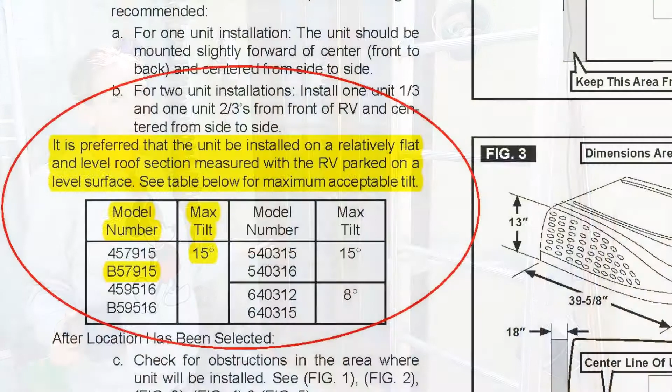The manual for the Dometic Brisk II tells us that we have a maximum tilt angle of 15 degrees. We're measuring the slope of the roof with a little angle meter, showing it to be less than 10 degrees. So it's essentially a flat roof, and we'll treat it like that.

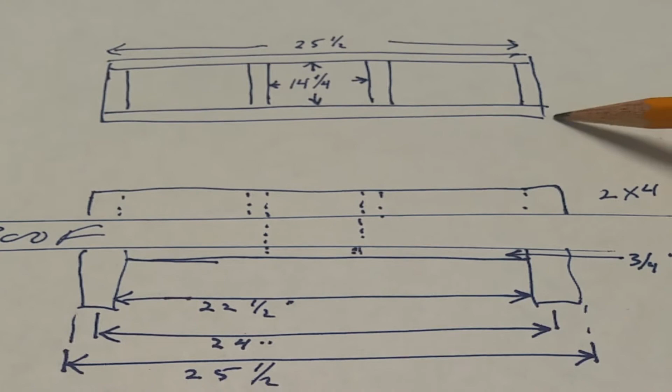To support the air conditioner, we're going to build a curb on the roof. The curb will extend to span the support beams for the roof. And then we'll have interior pieces to create the 14¼ inch opening that's required for the air conditioner.

Our roof is less than 15 degrees. Therefore, our curb will be constructed of a single layer of 2x4s on edge. If your roof is greater than 15 degrees, you'll have to construct a curb so that it creates a level surface on which to mount the air conditioner.

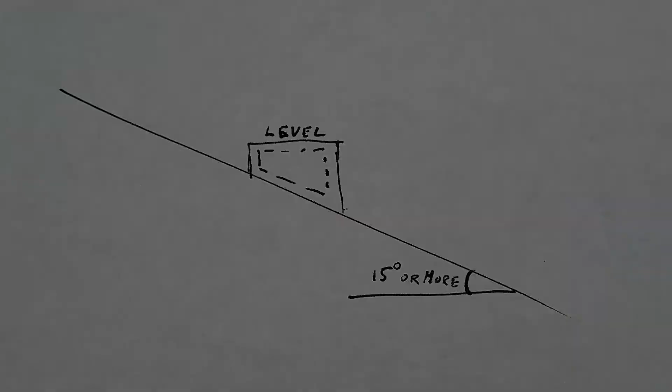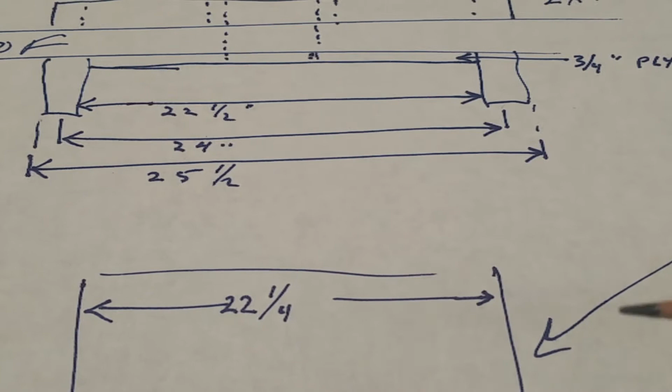Underneath, we'll have a piece of plywood, and that plywood will have the 14¼ inch hole centered so that we can tack it up to the ceiling and use it as a template as to where to locate the opening for the curb and then the air conditioner.

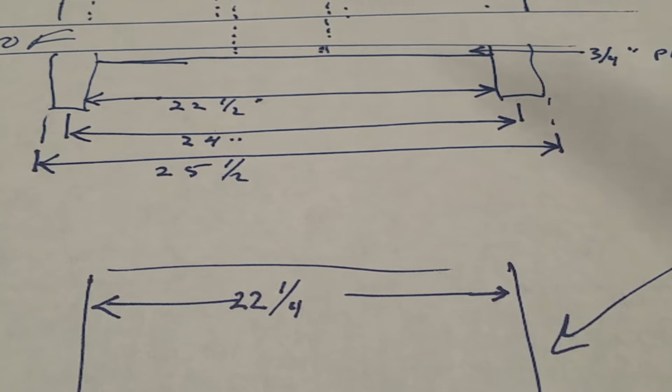The support beams for the roof are 24 inches on center, which means it's 22½ between the beams and 25½ to span the beams. So our support curb will be 25½ inches wide, and our plywood template will be 22¼ inches wide so that it can comfortably slip between the beams.

The 3/4 inch plywood, which goes on the bottom of the ceiling, not only acts as a template for where to cut the hole in the roof, but also provides a spacer that we can use to run the power into the control box on the air conditioner. Here you can see it laid out, and I used a router to cut a little channel where the cable goes.

Here you can see we've constructed the curb. You can imagine the roof support beams on either side. The curb will span the support beams, and then this 3/4 inch ply, which will fit underneath the roof, will slip between the support beams and also provide a template from where we can determine where to cut the hole in the roof.

Okay, so we've located the 3/4 inch plywood on the ceiling where we want the air box to be mounted. We've also drilled 4 holes, one in each corner, so we can find the markings on the roof when we go to install the curb later. So now we've used those 4 holes we drilled to locate the prefabricated curb and mark where we want to remove the roofing.

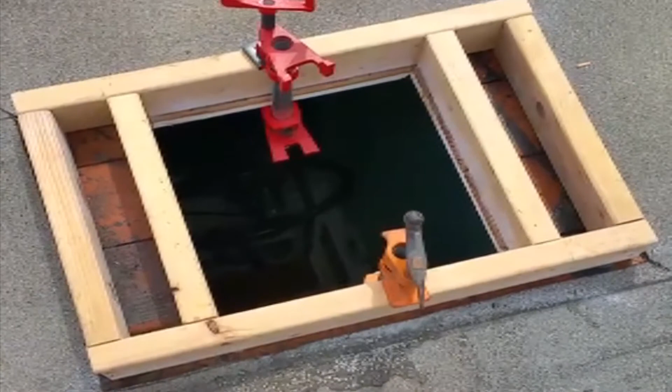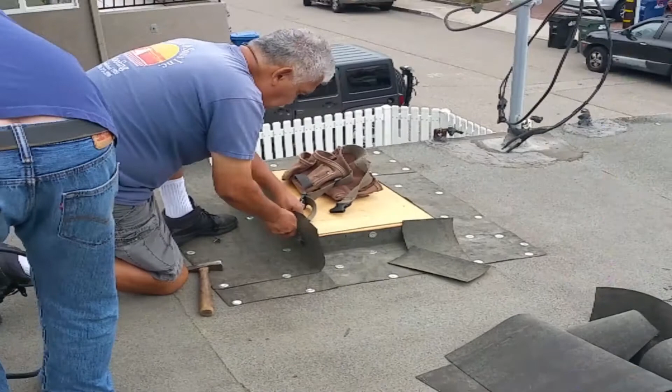Okay, so we got the hole cut, and I clamped it in position so it doesn't drift when we toenail the curb into those support beams running along the side on the bottom. Not too confident about my roofing ability, so I had a professional here seal up the curb.

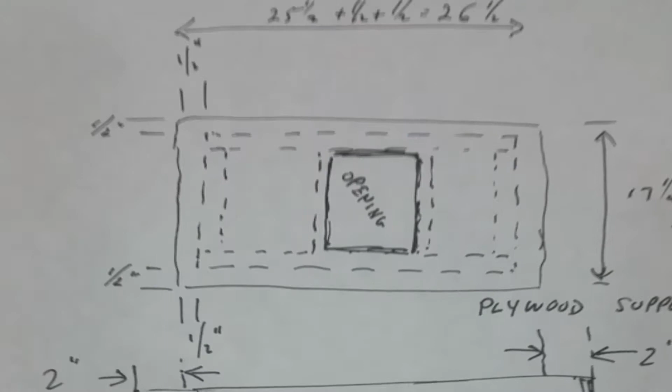We're going to want to add counter flashing to the top of the curb to make sure everything stays waterproof, and the water, when it rains or condensation from the air conditioner, can flow down onto the roof. First thing we'll do is cut a piece of plywood that's a 1/2 inch longer than the curb in each dimension. That way the counter flashing will fit over the roofing coming up the curb.

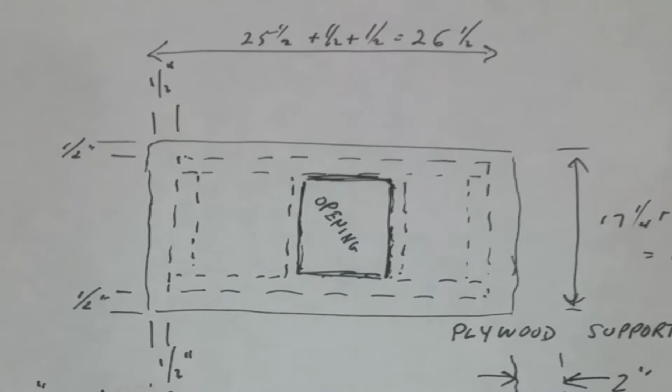So for example, the curb is 25.5 inches wide. We'll make the plywood 26.5 inches wide with the same 14.25 inch opening in the middle.

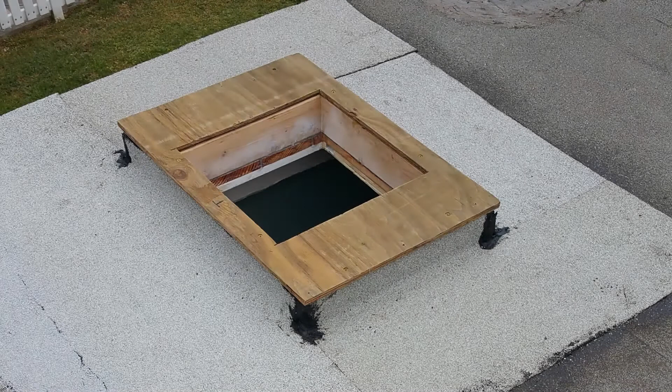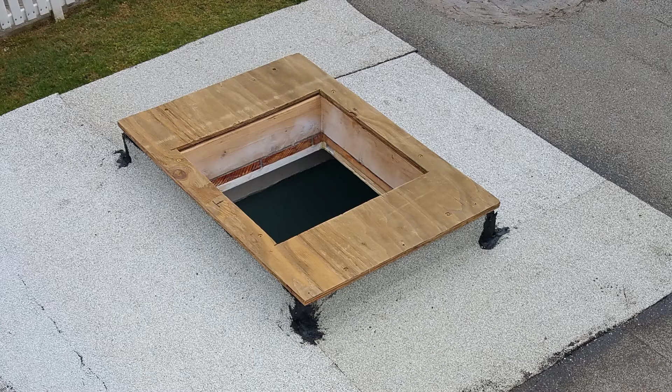So now you can see the roofing job is complete, and we've installed the 1/4 inch plywood that will support the counter flashing. If you look carefully, you can see that the plywood does extend beyond the roofing on all 4 sides, and it's been fastened to the curb with screws, and it's ready to go.

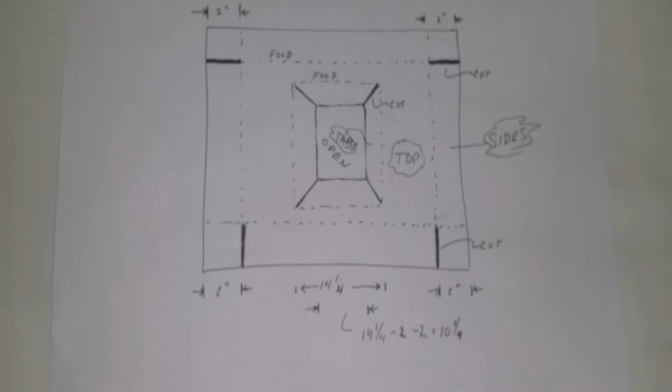Okay, so now that we got the plywood support in place, we'll make the counter flashing itself. We'll start with a sheet of galvanized sheet metal, and we'll cut it so that it is 2 inches larger than the plywood in every dimension. That's so that we can fold that down later to make the sides of the counter flashing.

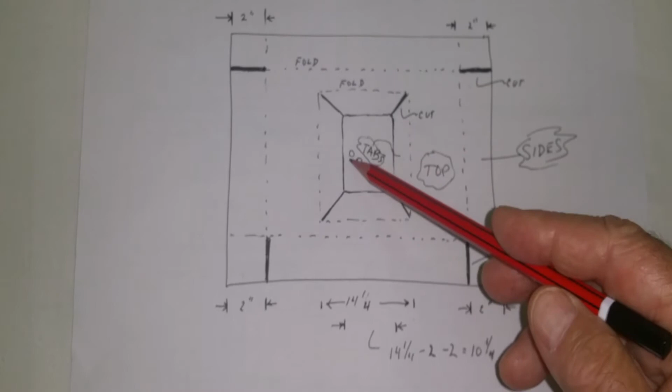In the center, we'll cut a hole that's the size of the opening, 14.25 inch, less 2 inches on each side. So 14.25 less 2 is 10.25. And we'll have a 10.25 inch square opening, and then we'll cut these slits indicated by the solid lines, and then we'll just fold it in place and have our counter flashing.

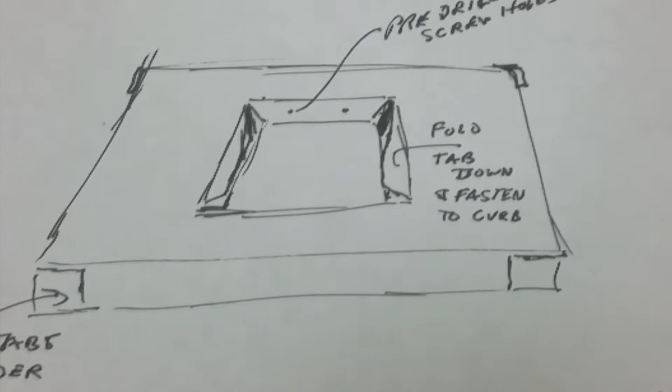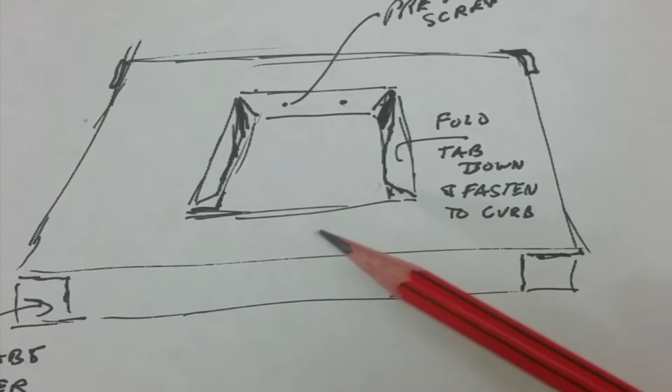Okay, so this is my little sketch of what we'll wind up with. So those cuts that we made, when we fold that down onto the 14.25 inch hole in the curb, we'll have these nice little tabs that we can secure the counter flashing to the curb. Then this will be a nice flat surface for the air conditioner to seal against, so we won't get any rain leaking in past that gasket that's on the bottom of the air conditioner.

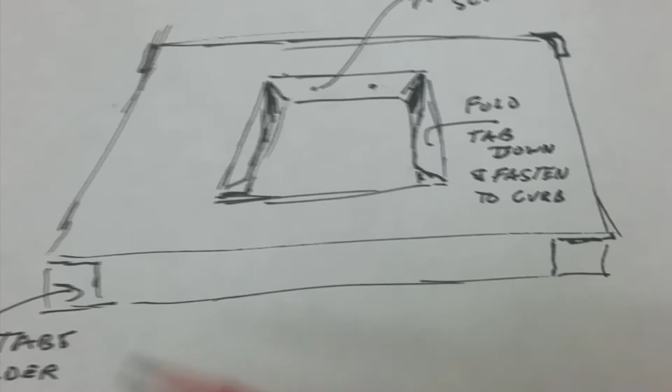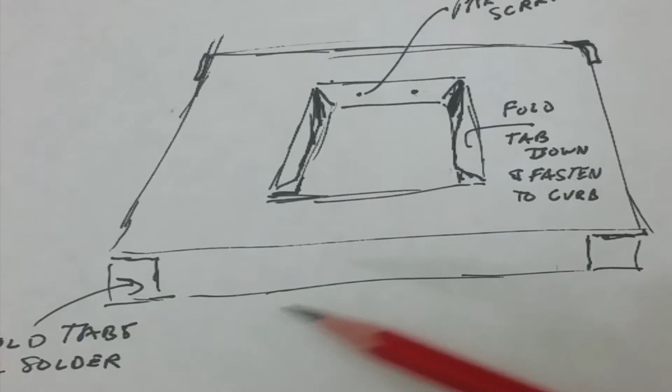After we fold down these ends, these tabs will fold over, and we're going to actually solder these tabs to the down piece, and so that'll make a nice watertight seal, so any water that gathers up here will flow right down past the top of the roofing and onto the roofing itself.

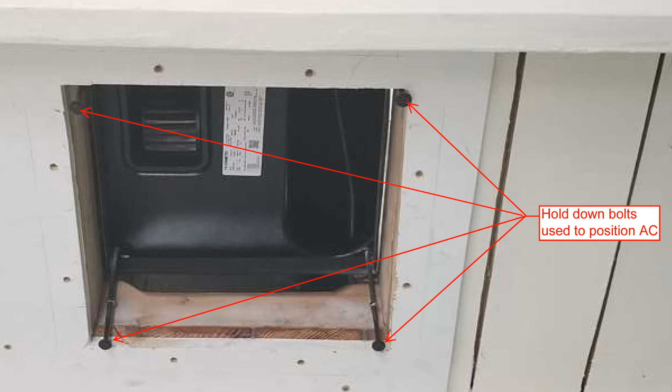Right here you can see the air conditioner is sitting on top of the counter flashing, and the roofing has been completed, and we're ready to go down underneath to finish. Here we see the air conditioner from the bottom looking up. It is sitting on top of the counter flashing and on top of the curb, and we have screwed in the hold down bolts a few turns so that we can use them to properly center the air conditioner in the opening.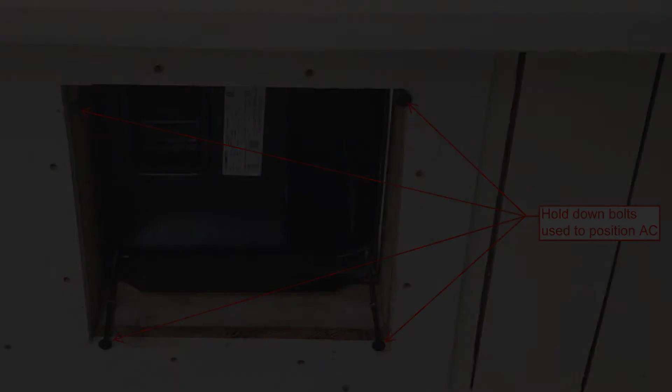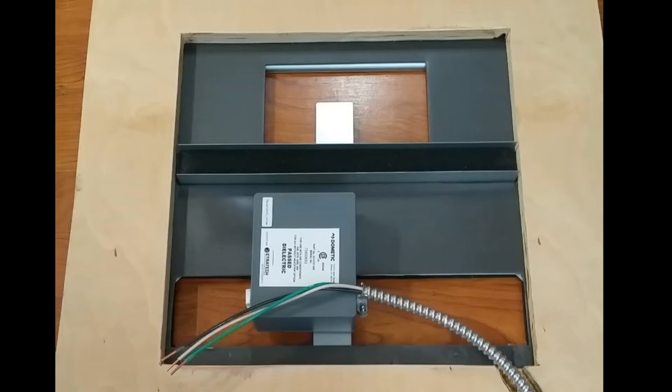Again, looking up at the bottom of the air conditioner through the opening, you can see the counter flashing tabs flush with the curb. We'll screw these tabs down to the curb and secure them that way. The control box is mounted on the air conditioner bottom support bracket inside the air distribution box and in the return air passage.

Now we have the bottom bracket for the air conditioner in place, and you can see the hold down bolts are now going through this piece and through some structural channel iron that's included with the piece. We torque the bolts to the specification, which compresses the air conditioner gasket, and everything is now nice and secure. Here we have the air distribution box fully installed with the power cable going to a junction box ready to complete wiring.

Just a quick word on thermostats. The air conditioner control box comes with the thermostat kit. One issue is that the thermostat and the air conditioner control box require 12 volts DC. Thermostats designed for the home normally operate on 24 volts AC. Therefore, to complete the RV air conditioner installation, we need to provide a 110 volt AC to 12 volt DC converter. Fortunately, these are readily available through Amazon, eBay, and so on.

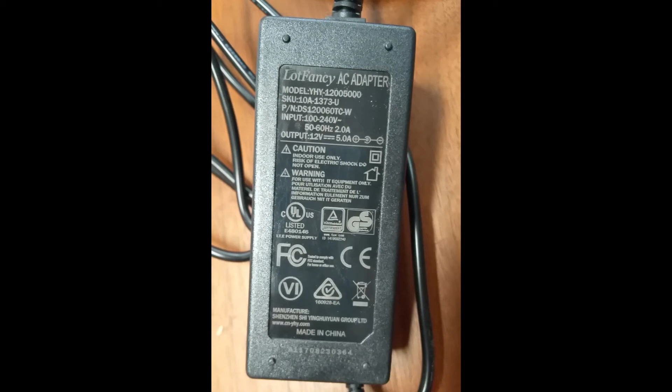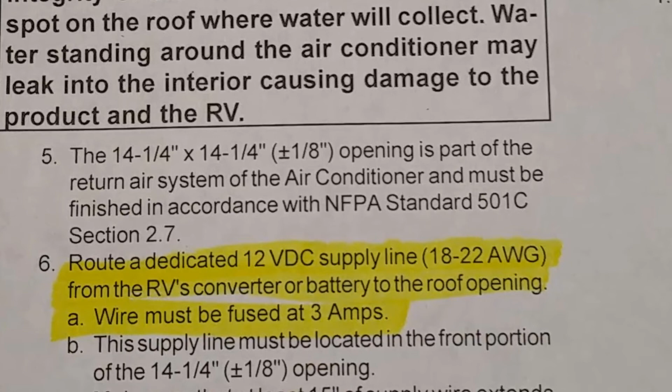The installation manual also requires a 3 amp fuse on the 12 volt DC wire. Here you can see the 110 volt AC to 12 volt DC converter plugged into an outlet and wired to a fuse block with the required 3 amp fuse. Wires from the control box and the thermostat are also connected in this low voltage junction box.

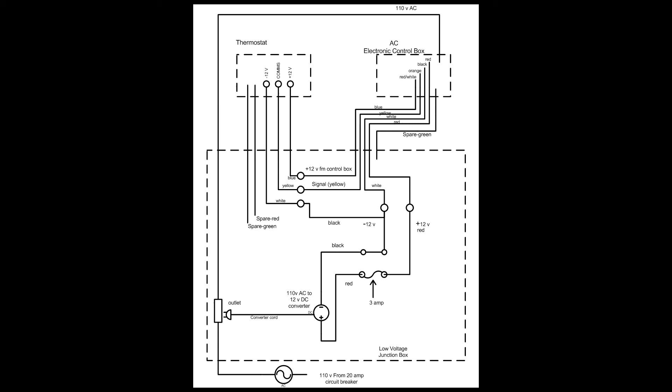With everything wired up, all that's left is to switch on the circuit breaker. And we have liftoff. One thing to keep in mind is there is a time delay from the time you turn on the air conditioner at the thermostat and when the air conditioner actually starts. This could be a little unnerving on the initial startup. And there you have it. Job complete and time to celebrate.